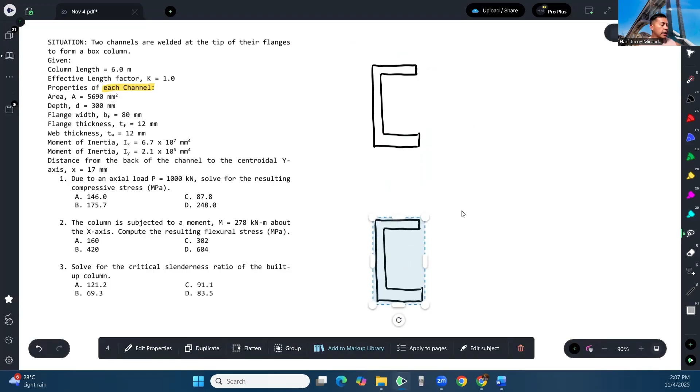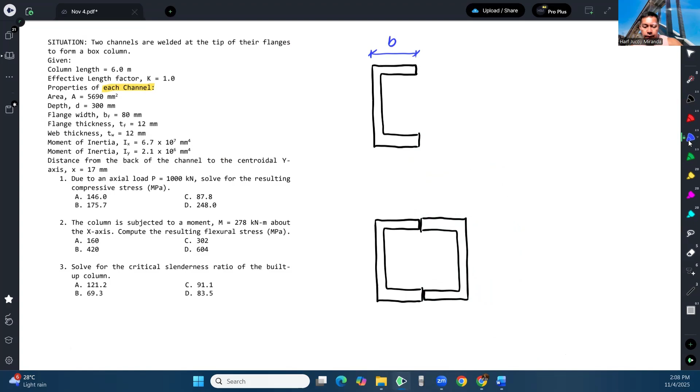So we have the flange width, this is BF, and the thickness of the flange. Then this is the overall depth, and this is the web thickness.

Now about the centroid of the channel - it's located here, at the halfway point for the x-axis, and somewhere here for the y-axis. The distance is defined by x, so this is x. That's the centroid, the properties of a single channel.

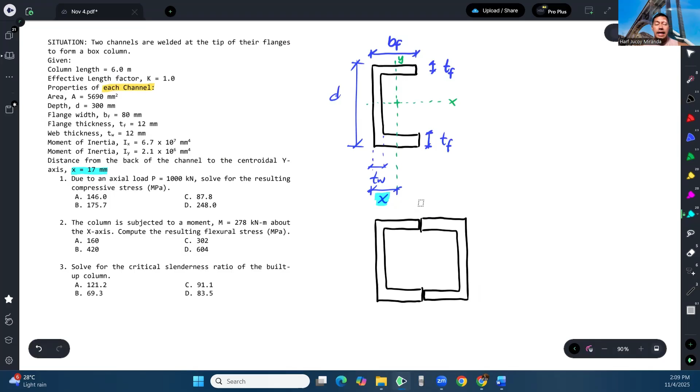So that's a review of the properties of a single channel. Now there are two of them - this is the built-up section. We joined the channels at the tip of the flanges to form a box column, so this is our cross-section.

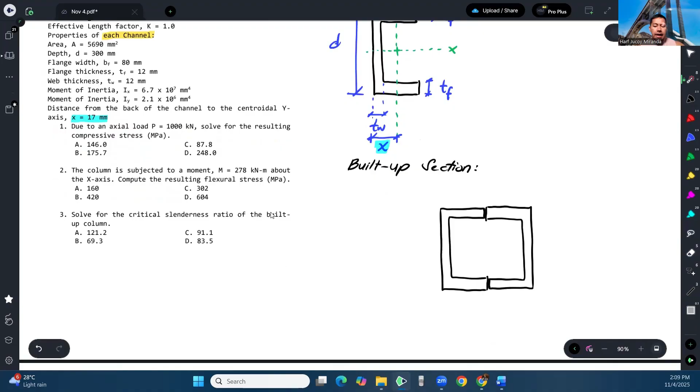For the first question: calculate, due to an axial load P of 1,000 kilonewtons, the resulting compressive stress. This first item is simple - it's just asking for the compressive stress.

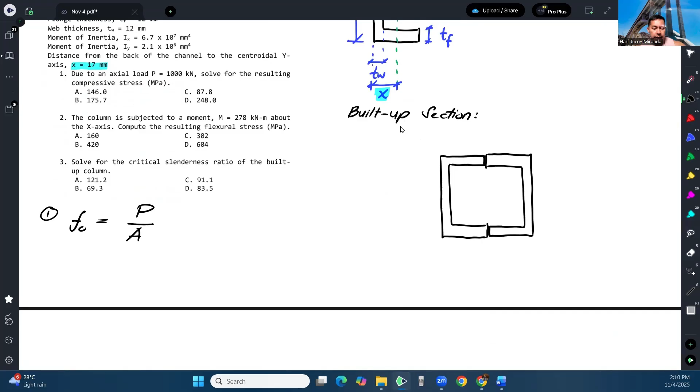For number one, compressive stress, called FC, is just the applied force divided by the area. Now our area will not be the given area of 5,690, because that area is only for a single channel. So the total area of this section is two times that area.

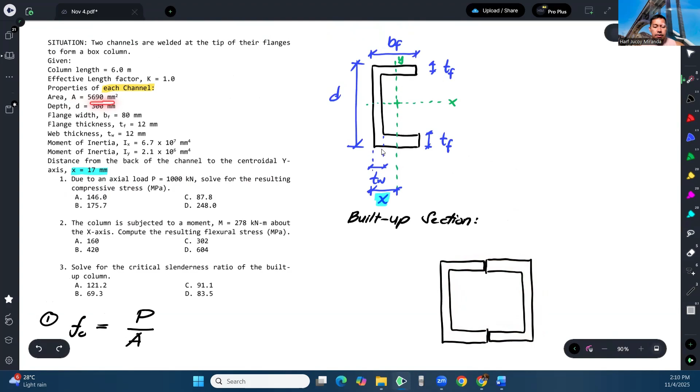So our compressive stress would be the applied P, 1,000 - let's convert this to Newtons so the answer comes out in megapascals. Then our area is 2 times 5690. If you check the units, this is in Newtons, this is in millimeters squared, so that gives us an answer in megapascals. So FC, the compressive stress, will be calculated as...

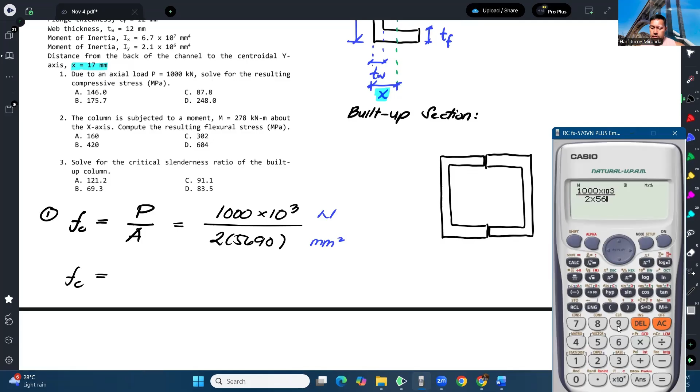That is 87.87 megapascals, and that will be our answer for number one. So that is letter C.

Next: the column is subject to a moment of 278 kilonewton-meters about the x-axis. I believe there's a typo here - I think the given value is 270. Let's check later, but it's 270. So the column is subject to a moment of 270 kilonewton-meters about the x-axis.

Compute the resulting flexural stress. So we need the flexural stress, and the moment is applied about the x-axis - that's important, which axis it's applied to. To calculate the flexural stress, we apply the formula Mc over I.

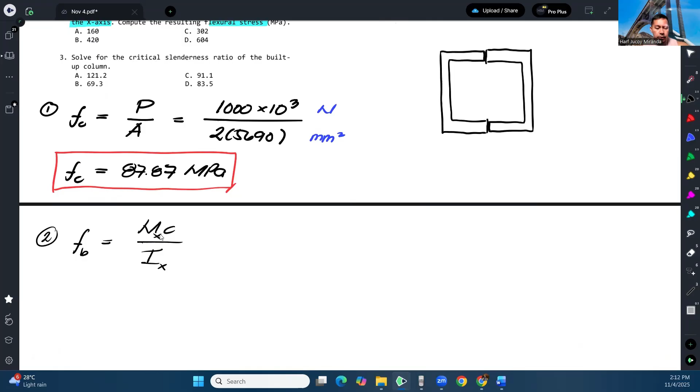Recall that when the moment is applied about the x-axis, the moment of inertia you use should also be about the x-axis. So in this case, this becomes the centroid - this is the x-axis, and this becomes the y-axis. Now our section becomes doubly symmetric.

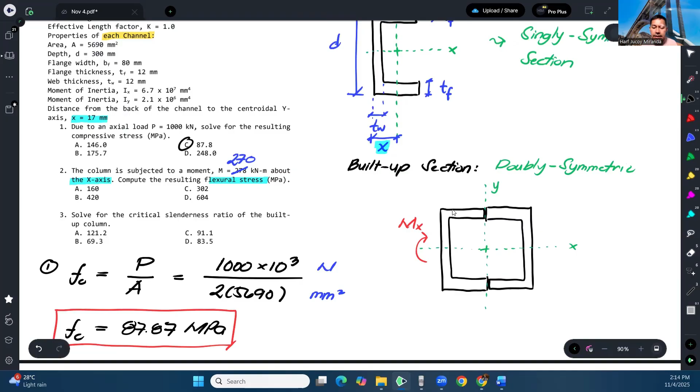Normally, kapag magkakompute tayo ng Ix or ng moment of inertia in general, summation lang natin yung transfer formula na ICG, moment of inertia about the centroid, plus AD squared. Sa channel na to, meron tayo ng centroidal moment of inertia niya, at ito yun: 6.7 times 10 to the 7. So yun yung ICG niya.

Plus yung area, 5,690, tapos D-squared. Ang centroid nitong channel na to nandito. Pinag-uusapan kasi natin is moment of inertia about X. At kung mapapansin natin, itong D na to dapat perpendicular dun sa axis na hinahanapan natin, at in this case, yung distance nito at saka nito with respect to the x-axis is 0. Kaya lalabas dito, wala siyang kailangan i-transfer kasi magkapantay lang naman sila.

Okay, that is for the moment of inertia of this left side channel. Yung right side channel, ganun din, actually same lang siya. Kaya dahil doon, i-times 2 lang natin to, and that will give us the moment of inertia about the x-axis of the built-up section. So literal na 6.7 times 10 to the 7 times 2 lang, or that is 13.4 times 10 to the 7.

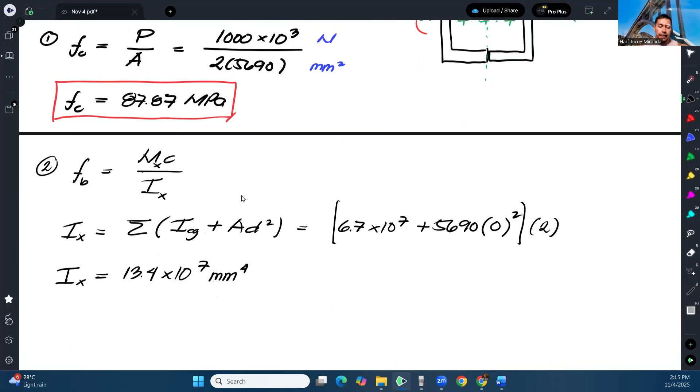Ngayon, because we are finding the flexural stress of the section, ang maximum flexural stress niya will be existing dito sa extreme ends ng section. Kasi ang itsura ng stress diagram niyan is parang ganito: dito sa neutral axis, 0. Tapos ito yung compression, tapos ito tension. Ito yung F bending na to, na maximum, nandun sa extreme fiber.

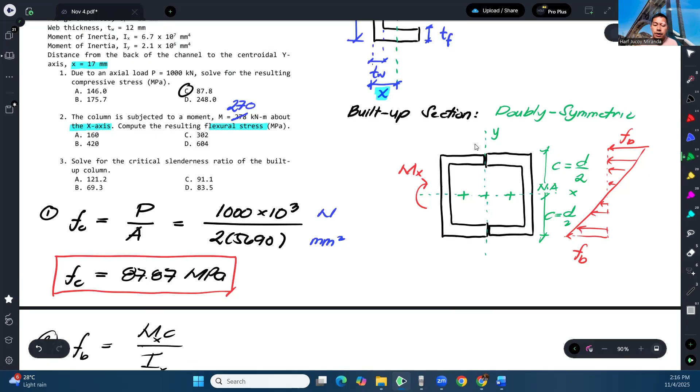Kaya yung C natin ay mula dun sa neutral axis hanggang dito, o di kaya hanggang dito, whichever is you think applicable. Anyway, parehas lang naman yun na D over 2. Parehas lang naman yun na d over 2, kasi diba d ito? At ang d natin ay 300. So therefore, yun yung c natin, mc.

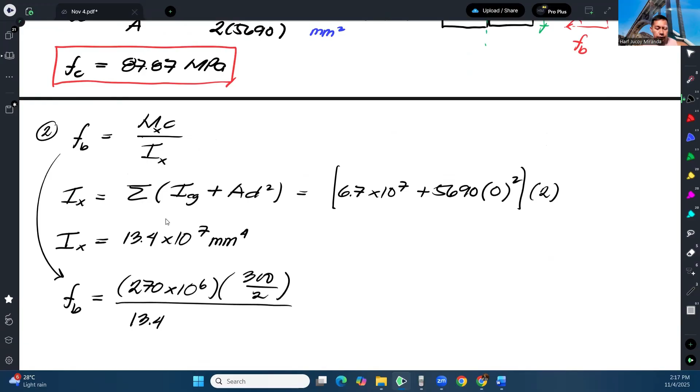So therefore, our bending stress or flexural stress is M, that is 270, gawin natin Newton millimeter. Yung c natin is d over 2. At yung I na gagamitin is 13.4 times 10 to the 7. And that gives us in megapascal, kasi naka-Newton millimeter na tayo dahil nag-multiply tayo ng 1 million. Ito naman millimeter, ito naman millimeter to the fourth, kaya itong dalawang millimeter na ito magka-cancel dito kaya magiging millimeter squared yan. And Newton over millimeter squared is megapascals.

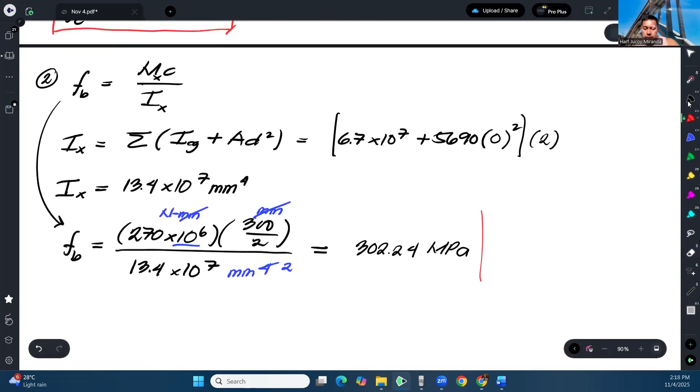So that gives us 270 times 10 to the 6 times 300 over 2, over 13.4 times 10 to the 7. And that gives us 302.24 megapascals. So that will be our answer for the second question, that's letter C.

Next, solve for the critical slenderness ratio. Pag sinabi nating critical slenderness ratio, means the largest slenderness ratio. Para makuha yun, for number 3, slenderness ratio is defined as the effective length, KL, over the radius of gyration. Kailangan natin ma-compare kung ano yung slenderness ratio sa x-axis and sa y-axis. Whichever is larger, we govern. Kailangan natin makuha yung R.

Yung R natin ay square root of the moment of inertia over the area. Para sa Rx, pwede na natin makompute square root lang ng Ix, which is already calculated to be 13.4 times 10 to the 7, over area. Area is 2 times 5,690. Ayan, so ito yung magiging radius of gyration sa x-axis.

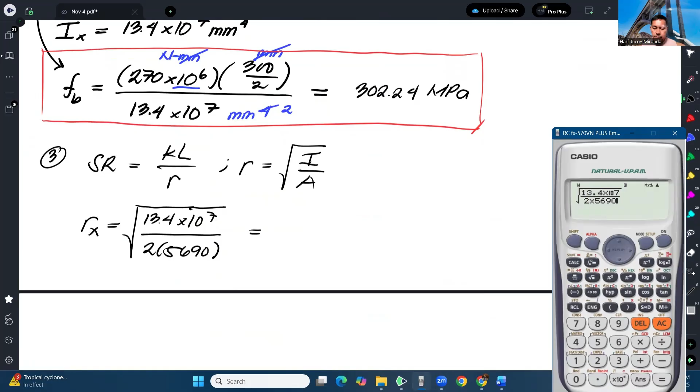And that is 108.51. Okay, and definitely we can now compute the slenderness ratio about the x-axis.

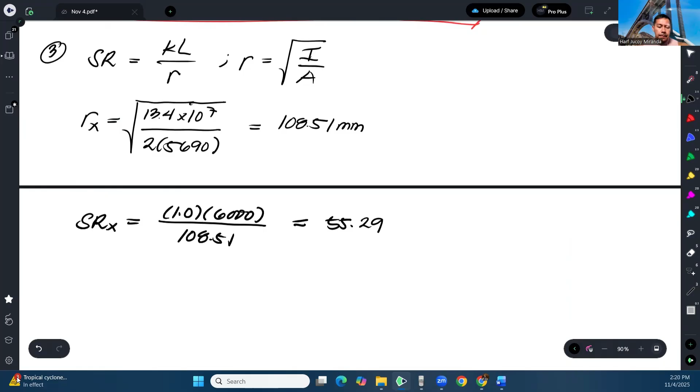Okay, now let's also check what the slenderness ratio is about the y-axis. So Ry is again the square root of Iy over A. So let's get Iy.

So what is the moment of inertia of this section about the y-axis? So if this is our axis, then of course the moment of inertia here about this axis is this. This is the moment of inertia here. But we need to transfer that moment of inertia to here.

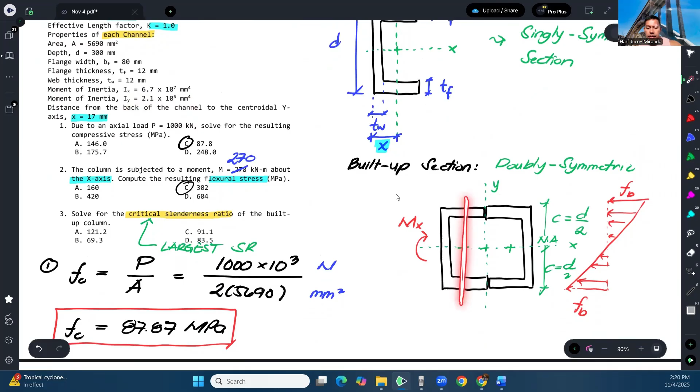So that means we have a certain distance here. So we have a D, the D in the transfer formula. Which is, from here to here, that's our BF. And then from here to here, that is our X. So therefore, this distance is BF minus X.

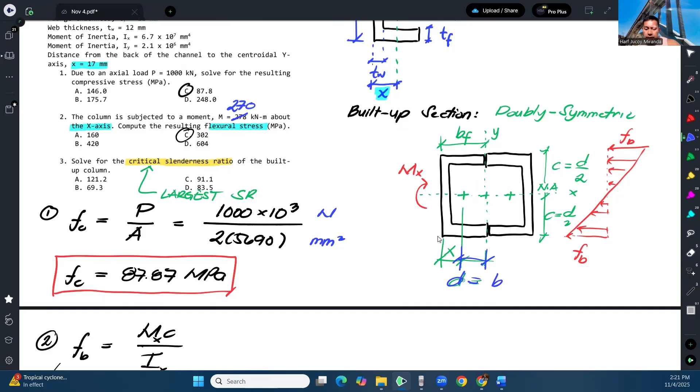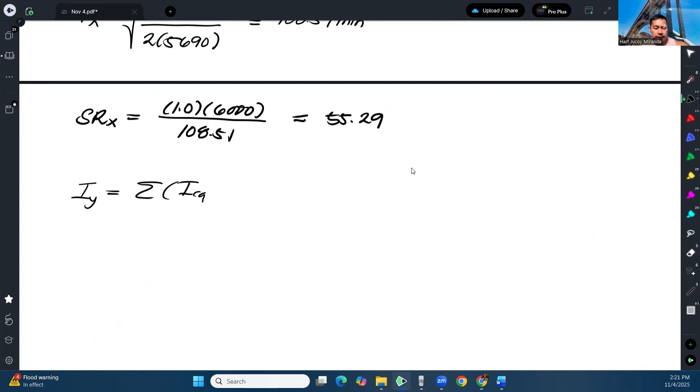Okay, so therefore IY is the summation of ICG plus AD squared. That is, our I centroidal about Y is 2.1 times 10 to the 6, plus the area, 5,690, times the distance. So our distance is this.

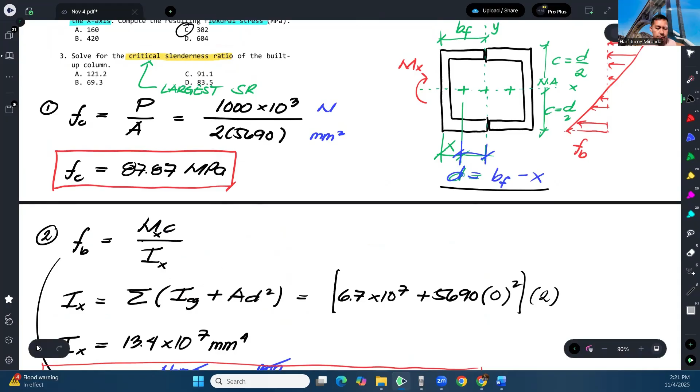That distance. So the BF given is 80, and the X is 17. So 80 minus 17, squared. So that's it, ICG plus AD squared.

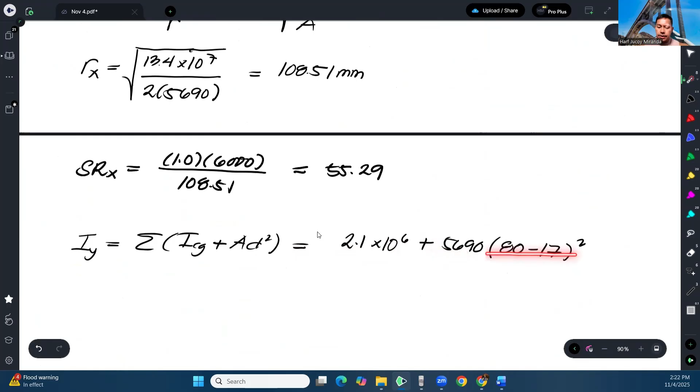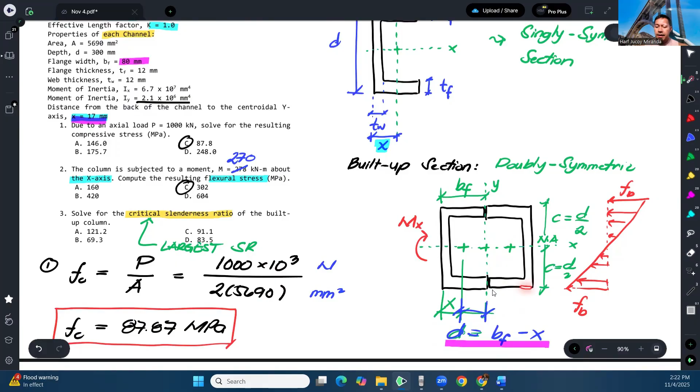That's just for this channel. What about the other channel? Actually, for the other channel, its I about Y is the same. Same value, and the area is also the same. And the distance here, from here to here, will be the same as this, because this is still BF, and this is still X. So it's still BF minus X, so actually this is just times 2.

Alright, so let's just multiply by 2. That will give us the moment of inertia about the y-axis. So, 2 times 2.1 times 10 to the 6, plus 5,690 times 80 minus 17 squared. So that gives us 49.367.

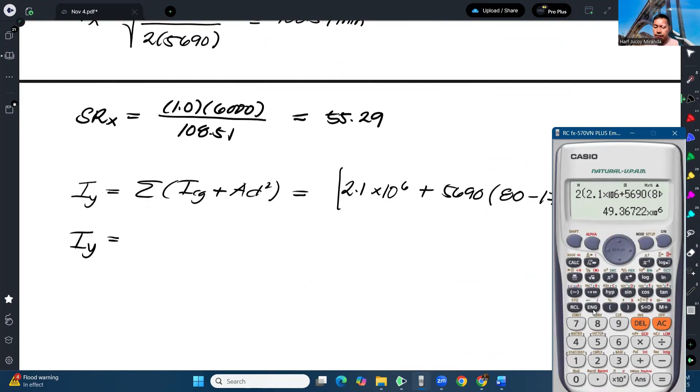And apparently, the IY is smaller compared to IX. So I just want to remind you that the moment of inertia tells us how resistant that section is about bending or flexure. So here, IY comes out to only 49, while IX is 13.4 times 10 to the 7. So this is much bigger compared to the other. That means it's stronger about the x-axis compared to bending about the y-axis, so this is the weaker axis.

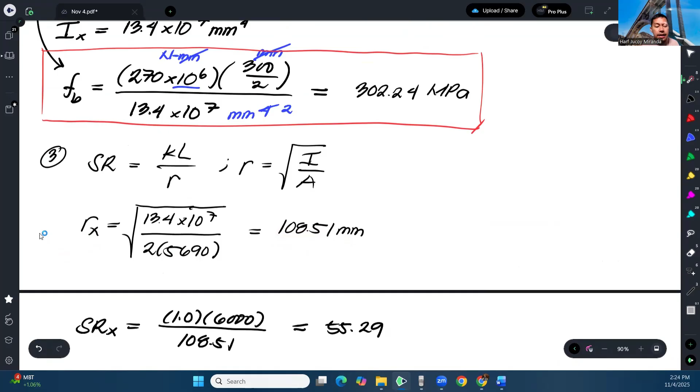millimeters. So if you compare once again the R, our radius of gyration about Y is 65.86, while the radius of gyration about X is 108.51. Once again, this indicates that the x-axis is the stronger axis because its radius of gyration is bigger compared to the radius of gyration about the y-axis.

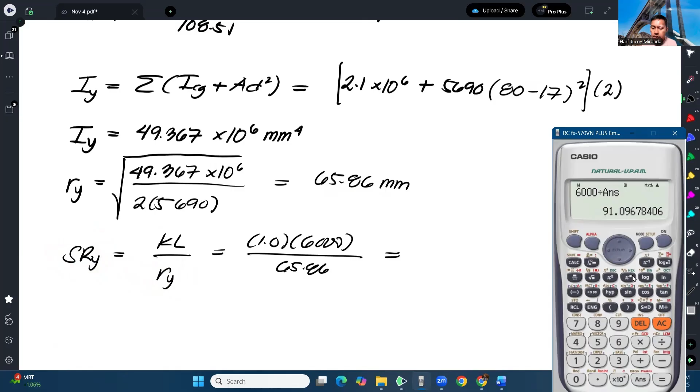So anyway, let's plug in the values. This is 1, this is 6,000 still, over 65.86. And that gives us, okay, so 91.10, let's just say.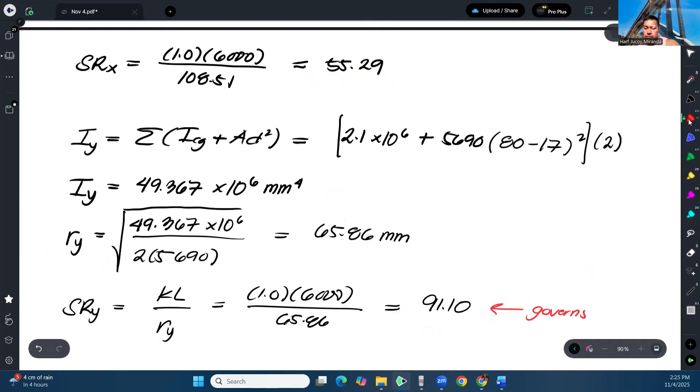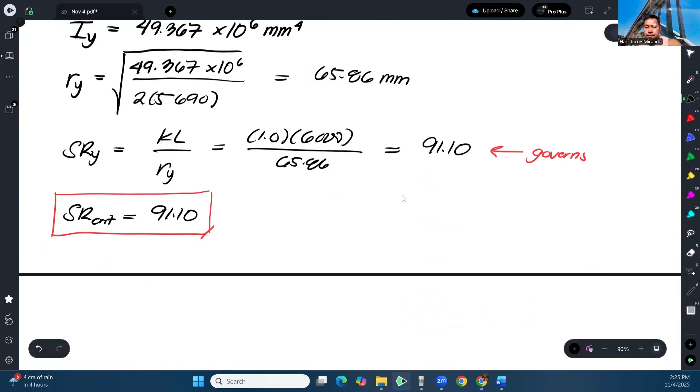91.10. Okay? And comparing with the other, this is the bigger one, so this is what governs. So therefore, our critical slenderness ratio is 91.1, and that will be our answer for number 2. Okay, that is letter... and that's how we solve this problem.